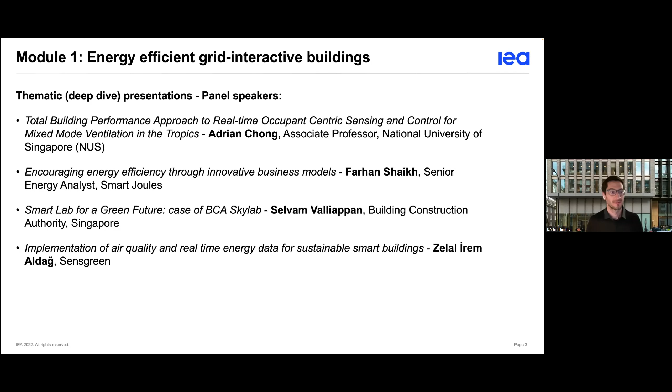So in the first instance, why is it that buildings are a really critical part of this story? And this analysis from the IEA shows the importance that buildings account for in terms of energy, direct energy use globally, 36%, for which residential buildings are responsible for 22%, non-residential for 8%, and then the process of constructing buildings, another area where innovation and technology and smartness can be brought in to improve emissions.

So when we look at the emissions, though, residential buildings are approximately 17% overall, but much of that is indirect. And this is really where we're talking about the grid. And non-residential, again, being a large part of emissions coming from grid, 7% of there from indirect. And again, building construction as a key part of delivering an emissions reduction strategy.

So the reason why we want to really focus in on the efficiency side is that we can reduce the amount of energy being used here. But then as we see in the emissions, that interaction with the grid is going to grow and become more and more important. So really being able to manage that and ensure that it is as interactive as possible to achieve the efficiencies as well as the emissions reduction alongside.

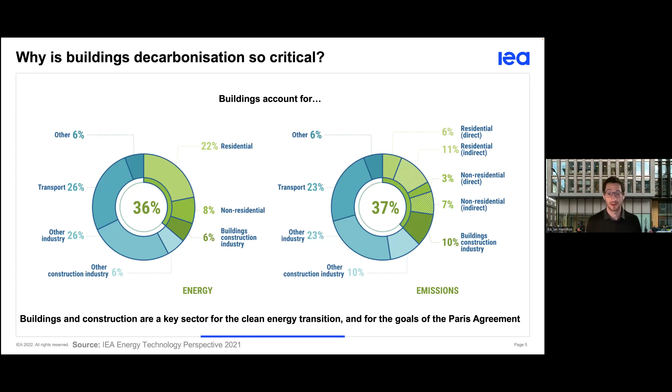The drivers of demand continue to change in that we know we need in many countries around the world, and certainly across the ASEAN, there's a growth in demand for housing, there's a growth in demand for buildings, and to continue to construct buildings in an efficient way is really critical here. So this figure really tracks across as we build more buildings and population continues to grow in some locations. The energy use is beginning to tilt downward. This is really important, and in particular, the emissions continue to tilt downward as well.

So it's important that as we build buildings, that we're mindful that their performance is going to be constructed so that their lifespan, the 20 to 40 years that they may be with us or longer, that they're going to use energy most efficiently. And that can be done today using technologies that we have.

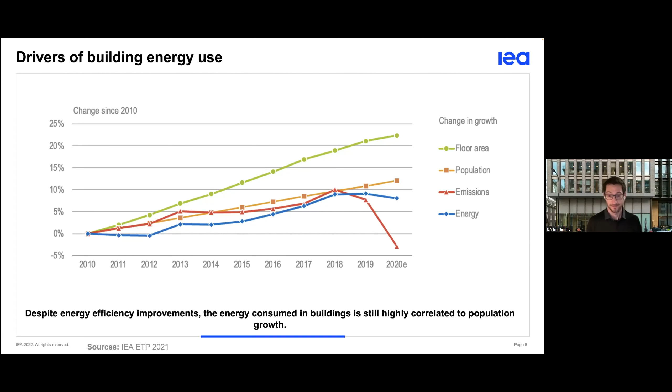In the first instance, the control that we have over development of buildings is in that initial design phase. And as our introduction noted, the ASEAN roadmap for building and construction towards net zero really supports those initiatives at the first instance of site design. So this is where we can really make first progress towards smarter buildings.

So being able to focus then on the building design itself, ensuring that not only have we laid out the development area in a way that supports efficiency, but also then the building design really focuses on the materials, the windows, the ability to avoid or minimize heat gains, and then focusing on the passive systems such as natural ventilation, the use of daylighting, the use of cross ventilation where possible, and then being able to consider those mechanical systems, heating, cooling, fans, and lighting.

And then we get into the area that we're talking about today, which is how it is that smart systems can support the efficiency of those mechanical systems, of the passive systems. But we really need for efficiency to be embedded first in that so that the smart systems can ensure that we have good occupancy sensing, daylight sensing, automated controls, and grid interactivity.

And then finally, through all of that process, we have an opportunity to build in renewables that will support the demand on site of energy, but then also to feed back and become more active with the grid, whether that's solar PV or wind or the like.

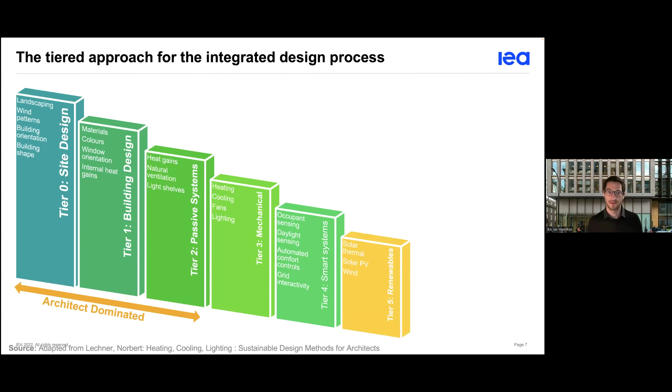So when we see your roles or we see our own roles within this process, these tiers, there'll be the designer-oriented roles at the very outset, and they're really critical to shaping what it is that the more engineering-dominated roles have later on. I'm just going to very briefly touch through the first and then pause for a moment on the latter. So, what is it that we can do at the very outset?

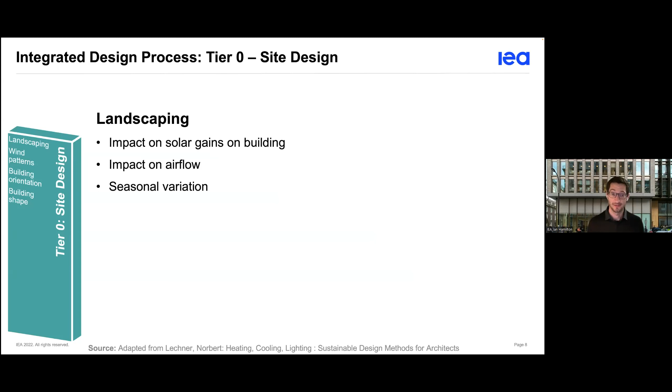Well, landscaping and solar gains on buildings. So this is really understanding how the buildings themselves are sited. Thinking about that seasonal variation at the outset. Obviously, across the region in the ASEAN, there's considerable difference in terms of that environment, and being able to make use of those natural flows is really important. So whether that's wind patterns or orientation of buildings in terms of solar gains and the like.

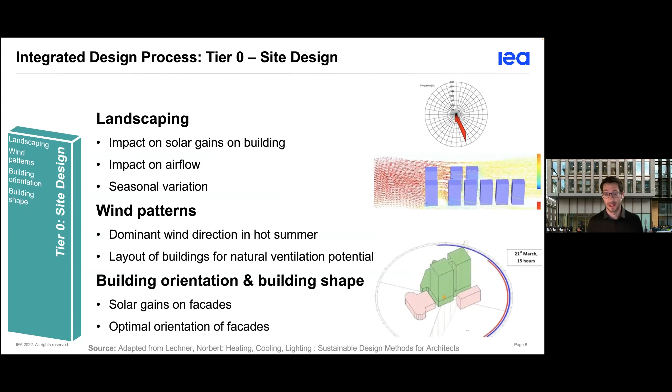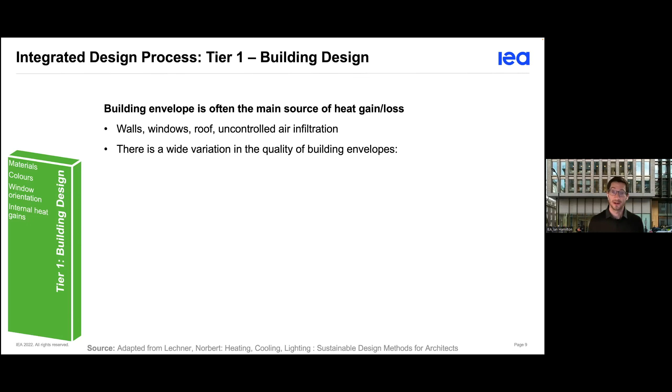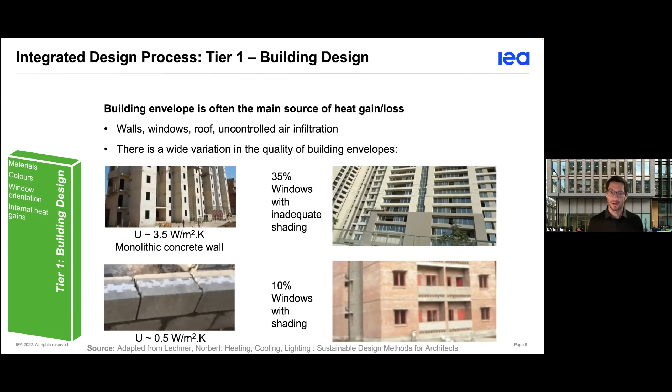We can then think about how the building is constructed. So thinking through those uncontrolled air infiltration, the variation of the quality of the building, of the envelopes, moving from what might be very high dense materials, very heavyweight buildings, through to different opportunities of window and glazing, lightweight structures, better purpose for ventilation. And these types of design decisions that we make at the outset will affect how we need to be able to heat, cool, light these buildings going forward.

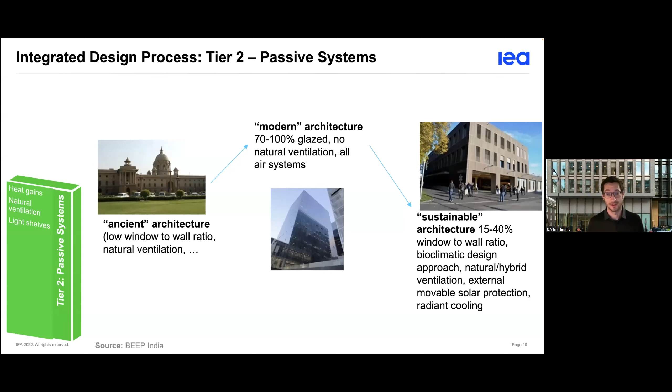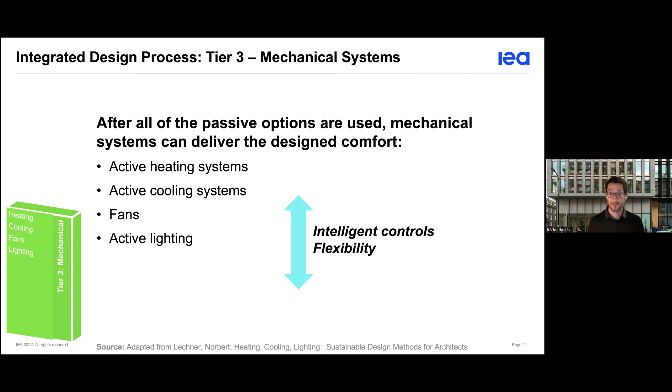So then we get into the mechanical, and as we increase the intelligence and flexibility of those systems, we can better ensure that comfort is being achieved when energy is most needed to be used. So active heating and cooling systems, fans and lighting can be placed alongside the available resources for passive means. And so what does that mean? It means making use of smart systems that are capable of doing that and supporting these.

So for example, when looking at smart occupant sensing in buildings, we're able to heat and cool that space or daylight that space so that it's comfortable when people are using it. And at other times, it's not essential to be able to achieve the really high standards, say for an internal temperature when it's not being occupied.

So there's lots of really great examples across the region of buildings that are becoming much smarter around how they deliver comfort in times when they're being occupied, but then being able to vary their controls when unoccupied. So having automated weather adjustments and comfort controls, and our speakers today are going to highlight some of these in terms of that really fine scale control that buildings might have within single office spaces or single dwellings, through to very large across an entire portfolio of buildings being able to control and adjust.

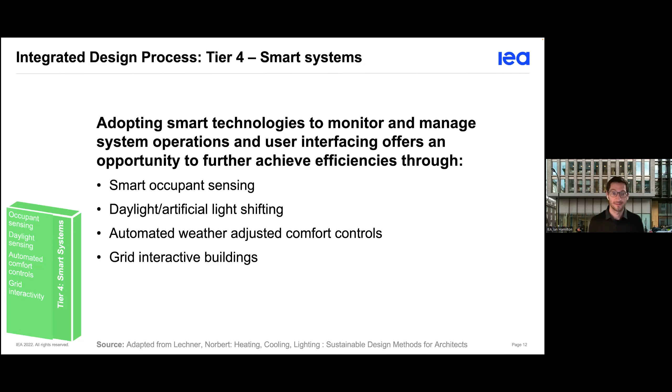And the last one being on-site renewables. And this is a real opportunity for us to integrate in the building renewables that support, for example, on-site generation, or being able to switch certain types of fuels, improve the grid resilience. And I think this is, again, something which Randy mentioned, the idea of that interconnection between buildings so that there is resilience going both ways.

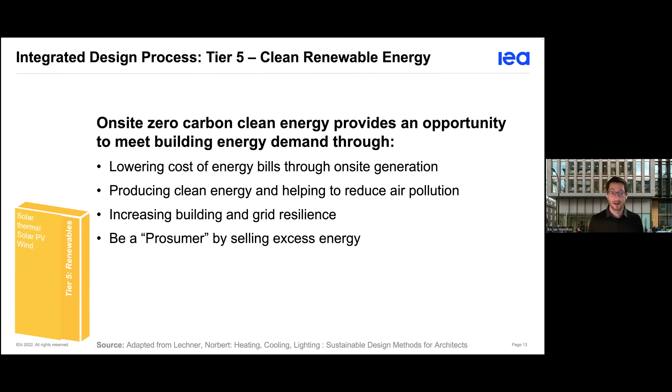The building can act as a buffer and a mechanism to improve resilience of the grid, and likewise, the grid can become more resilient when it knows buildings are as efficient as possible so that they're not drawing big demands during periods when, for example, heat waves are being experienced. And it's also an opportunity for a more engaged building, as it were, to be a prosumer, to be able to sell the excess energy that may be generated from renewable sources into the grid.

I wanted to take also a moment here to highlight some of the concepts that we have around zero carbon buildings. And in the first instance, it's critical that energy efficient buildings are that first step. And this figure that we have here showcases that transition from highly efficient buildings to those that are capable of becoming zero carbon. So a low carbon building should already be an efficient building, but then begins to increase the supply of renewable energy or low carbon energy.

And then as the building is able to reduce its demand further, more on-site available renewable energy can continue to offset that on-site demand, till we get to a point where we have a net zero carbon building, and that is where it is efficient and relies on renewable energy sources that really meet that demand over the course of a period, for example, a net zero annual.

And lastly, zero carbon buildings, and this is where a building can meet all of its demand through on-site renewables or off-site renewables. And the last stage, which is really critical towards achieving our targets ultimately, is a whole life cycle net zero carbon building. And this is where both the building, in terms of its operations, is net zero, but also the emissions associated with its construction. This is a really critical part of those materials becoming lower carbon and zero carbon in time to support this.

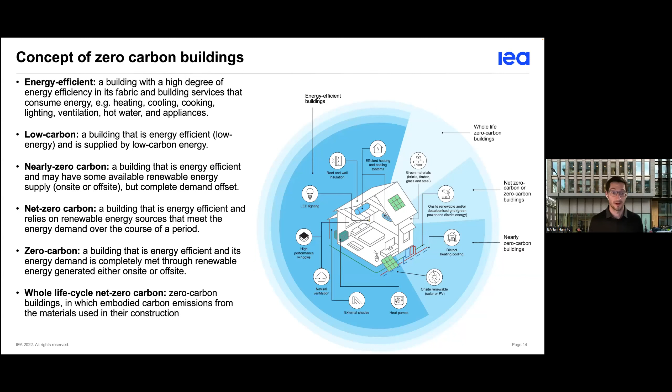So I'm going to very briefly mention a few things to help set the scene around efficient operations of buildings. We know that as we see demand for end services increase, it's really critical that we're able to see that growth occur in a most efficient manner.

So appliances, for example, and ownership of appliances across the region here in ASEAN, some analysis done with the IEA, looking at end uses by 2030, and really being able to note that we do expect there to be growth across residential and non-residential. And a lot of that is embedded in more efficient units so that they're able to curtail the amount of energy needed in the future, but not the amount of services being provided. This is really critical. We need to ensure that there is a greater increase in access to energy to support

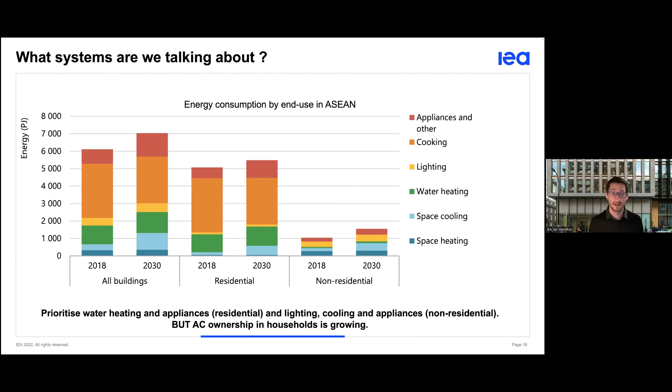the quality of life. When we look at what sort of systems and operations we're thinking about, a smart building is going to be one which is better able and better attuned to its occupants, whether that's smart lighting, smart security systems, smart energy management systems that are balancing everything from electric vehicle charging through to daylighting and ventilation systems and the like.

And then as we move through looking at indoor environmental quality, this is again a really important part of smart buildings and their operation for efficiency, also thinking about when can the building really open up and breathe, to ensure that the air quality is well maintained. And then when it needs to be, filtering air and making sure that it's safer.

And ultimately, being able to track the operation of the building ensures that the systems are working effectively, that the operation is being tracked and maintained. And that means that we can have a system that has a longer life overall.

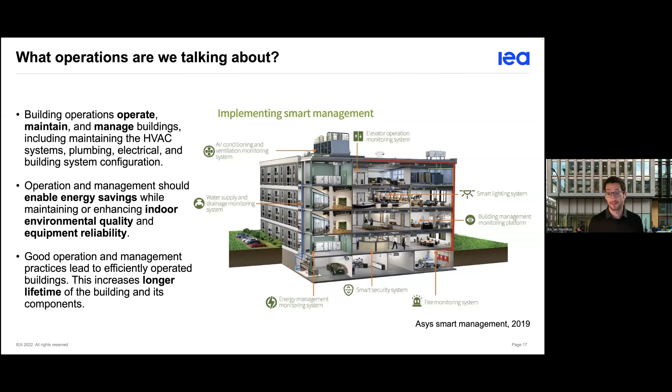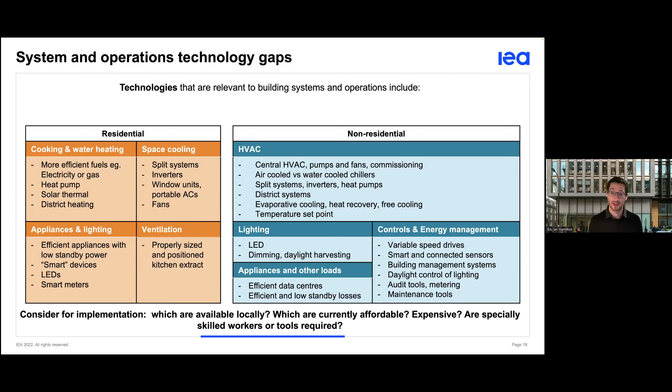And then in non-residential, we have an opportunity to really think about much larger systems. And again, being able to balance the needs of what's going on in that space, for example, office work or factory work, to be able to make use of more efficient technologies. I'm just going to say a few last words before getting into the detail of grid interactive buildings and leaving it to our panel to explore that further.

But when we look at the net zero emissions scenario that the IEA produced last year, we really want to highlight that behavior and avoided demand, efficiency and electrification are the key ways in which buildings are going to deliver emissions reductions. So we see here that behavior and avoided demand, but energy efficiency coupled together with smart systems, are going to be really critical for that.

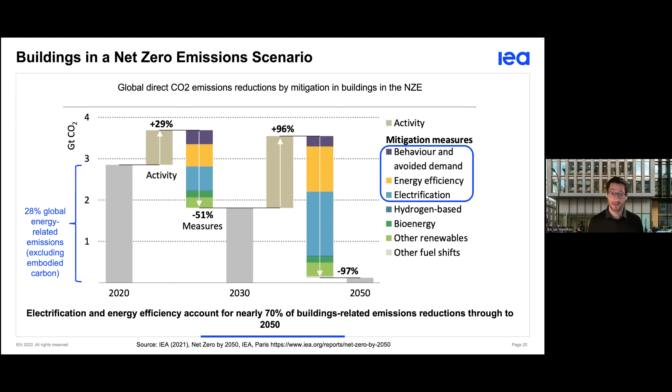And so as we move from the current situation through to 2050, we need to adopt these systems that are able to support that. And as a part of the system that we're looking at, we're looking for the idea that we move from a more intense system, which has a lot of potential for improvement, through to these different technologies being adopted.

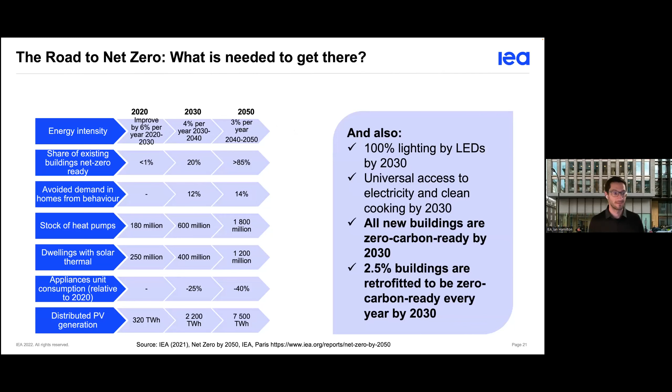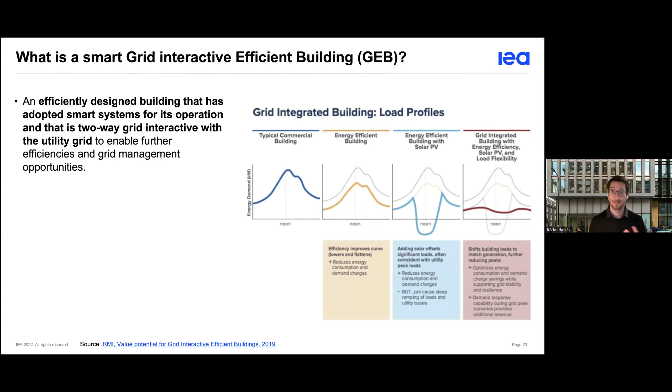So just in summary, as we go towards smart interactive buildings, the types of opportunities we see here are that they're efficiently designed, that they're able to adopt smart systems in their operation. They're going to become more interactive with two-way interaction with the utility grid to make better use of the demand of the building and opportunities of renewable generation.

When we look at the different ways in which we can think of grid interactive buildings, we have the communication system within the building, we have the communication across all the different activities of the building, of the service demands of the building, and these are being optimized to deliver efficient, but also low cost in terms of time-of-use pricing or other grid opportunities to reduce the burden of buildings on the grid, but also to make them more self-sufficient where it's sensible to do so.

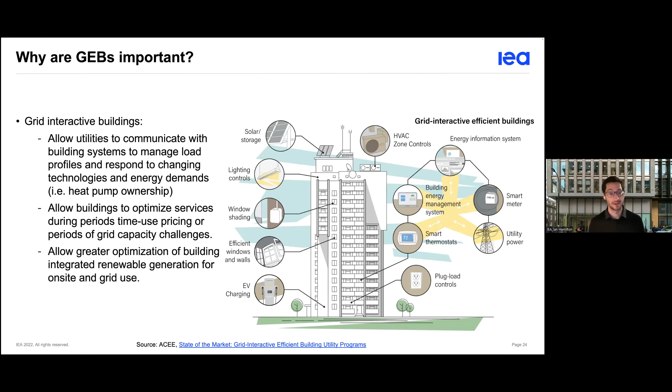And as we move towards a more grid interactive system, we want to see efficiency embedded in all of those aspects, because as we know from that initial set out, as we reduce the demands, we can better make use of the opportunity for renewable energy to achieve on-site and zero carbon outcomes. So I'm going to stop there.